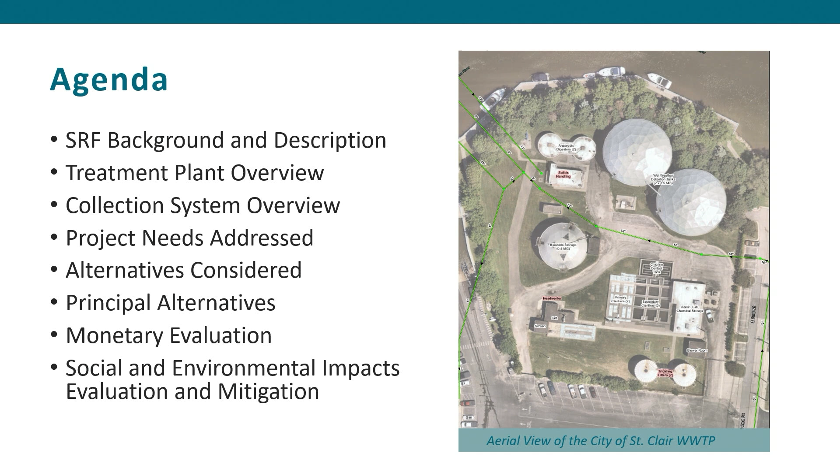Then go into a little more detail on what the SRF program terms the principal alternative, or the selected alternative, and talk about the monetary evaluation for that selected alternative.

And then go through those social and environmental impacts. So the SRF program, like I mentioned, was created in conjunction with the Clean Water Act, around 1987 when this program was developed. It's administered through EGLE — DEQ, DNR, whoever you want to call them, EGLE today. The program is intended to address water quality issues in the communities. It provides low interest funding and potentially some grant funding for studies and improvements to drinking water and wastewater systems.

So here's that graphic of the existing wastewater plant again. I'll go into a little technical detail here, but jump in with questions if they come up. The plant receives influent from the collection system, and that influent flow is either pumped directly into the treatment facility or into — I don't think you can see my cursor, but the two largest round tanks on the upper right side of the screen — those are the wet weather storage tanks.

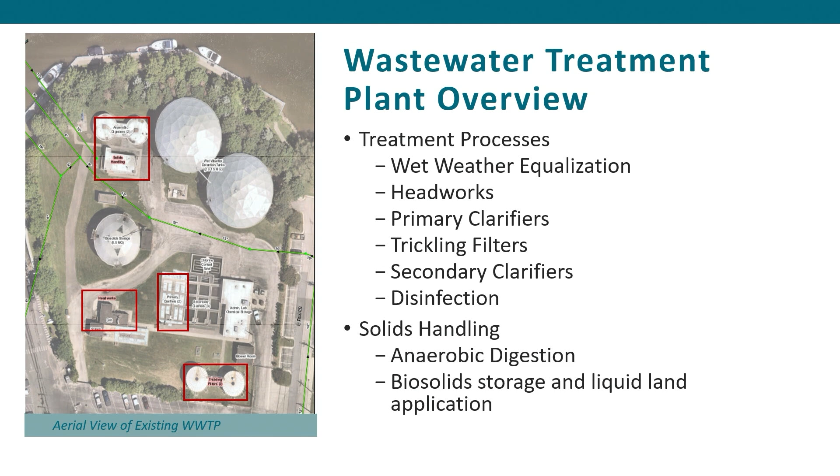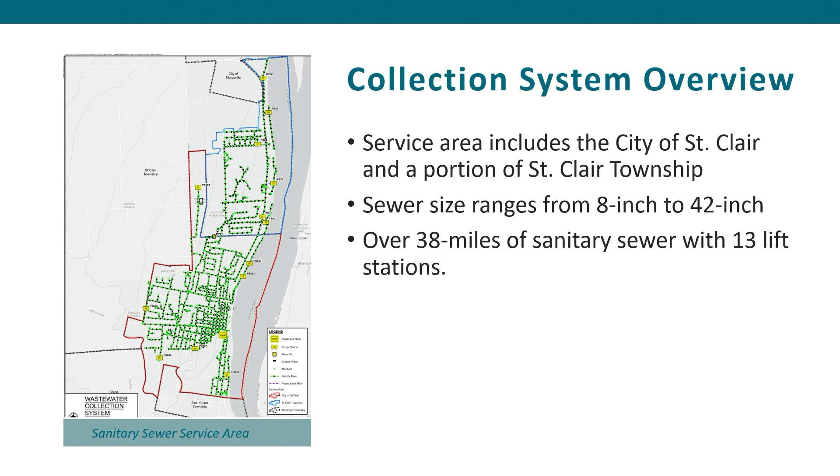Here's an overview of the collection system. The City of St. Clair, as well as a portion of St. Clair Township, are served by the collection system from the wastewater plant. Sewers range in size from 8-inch to 42-inch, and there's about 38 miles of sanitary sewer throughout the system.

To get into the need for the project, there have been a number of sanitary sewer overflows from the collection system. There are two wet weather storage tanks, but they sometimes have trouble utilizing those effectively, and as a result there's been some overflows. There are also safety and operational concerns throughout the plant.

A couple I'd like to highlight include some HVAC and electrical equipment in the headworks building that presents a safety concern. That environment can have an explosive atmosphere, and some of the equipment in those facilities isn't rated for that. And then also the trickling filters are a concern.

They have some rust through the existing tanks that present some safety concerns. The domes on those are in pretty poor condition at this point, through no fault of the city or the operators. They're just approaching the end of their useful life and are showing it.

We're looking to address those concerns. We'll get into the cost more, but since that's the number everybody cares about, we like to put it toward the front of the presentation. Our total estimated opinion of probable cost at this early stage is $5.72 million.

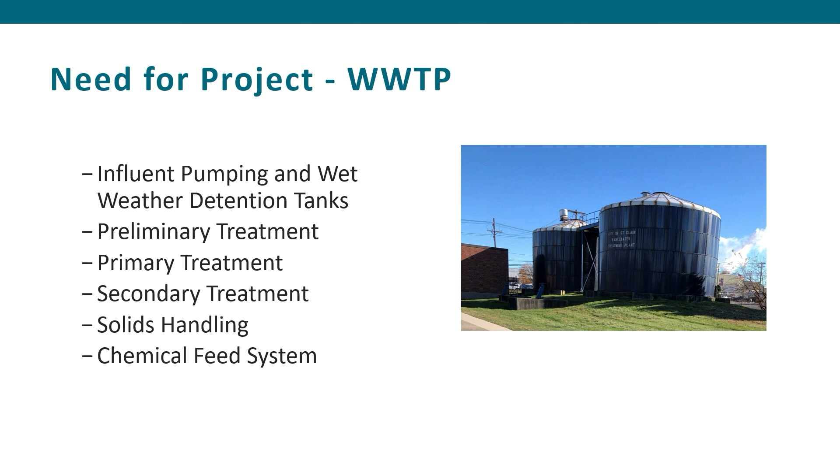In the collection system, the pump stations currently don't have backup power, so during wet weather events there are often power outages. Operators have to go around and try to deal with that the best they can, often through bypass pumping in certain instances. So we're looking to address that by providing backup power options, and also making improvements to the collection system.

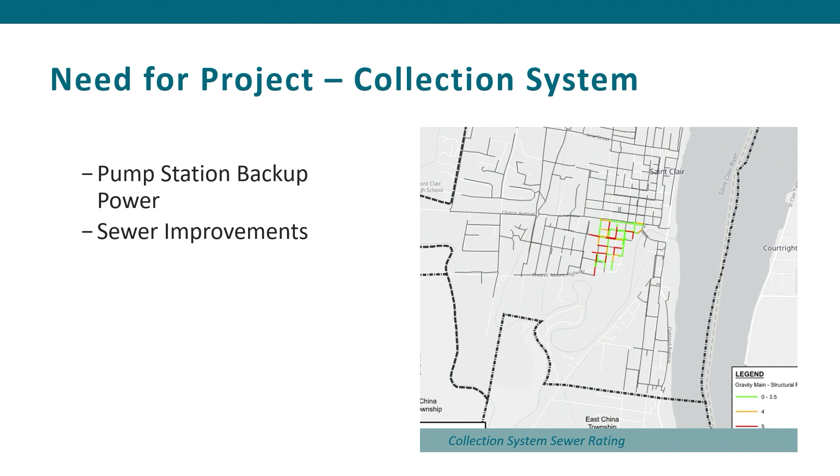For the pumping system, Dan's going to go through some of the details and alternatives we looked at in more detail here. But I'm going to step aside and let him take over. Thanks, Josh.

There's a somewhat prescriptive nature that the state requires for us to look at these alternatives. We look at 3 different alternatives for each recommendation: the first is a no-action alternative, the second is to optimize existing facilities through improvements and selective rehab, and the third is a construction alternative, which generally means completely replacing the item or process.

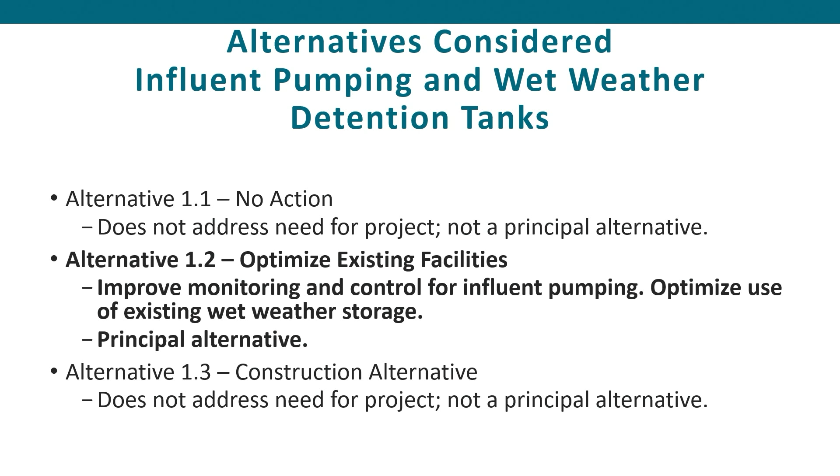For the influent pumping and wet weather detention tanks, the no-action alternative would not address our concerns about fully utilizing wet weather storage. Alternative 2, optimize, is what we're looking at to improve monitoring and control. The third option, replacing the wet weather storage, is overkill, not cost effective, and not the selected process. Most of these alternatives will end up being optimized; there's only one where we're doing a full construction alternative.

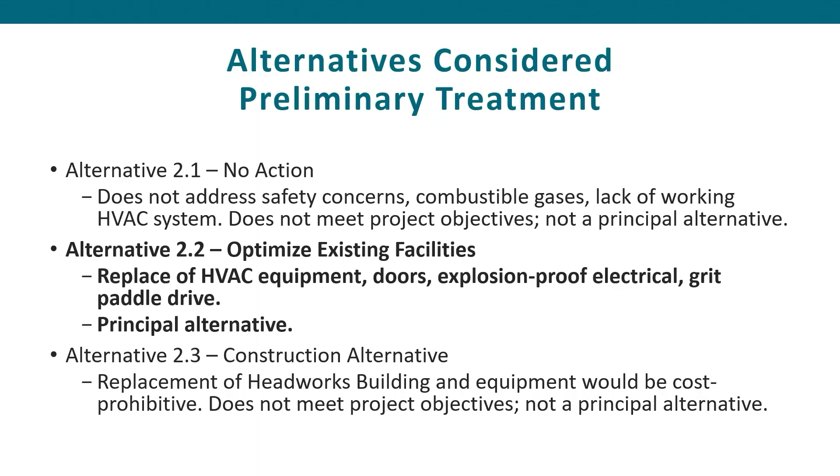For preliminary treatment, replacing the HVAC equipment, doors, and adding explosion-proof electrical, grit paddle drive is the optimize option. No action would not address those safety concerns, so that's not good for us, and construction of new headworks is not necessary and would be cost prohibitive.

For primary treatment, we're looking at repairing and replacing some existing chain and flight equipment and clarifier drives to maintain operation. We don't need to fully replace those tanks, so again that's the optimize existing facilities option. We feel the no-action alternative would not address the concerns we have at the primary clarifiers.

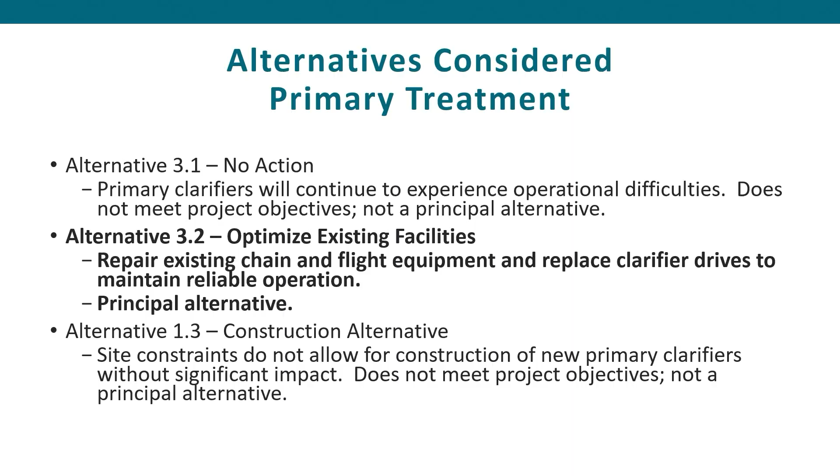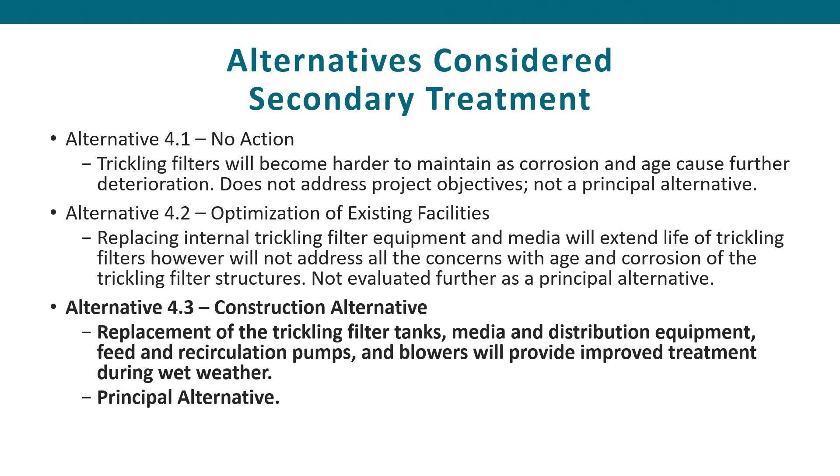This is the one area where we are recommending a full construction alternative: the trickling filters, those two tall towers, the bolted steel tanks you see at the wastewater plant. They've been harder to maintain due to corrosion and age. The no-action alternative is not effective, and while a rehab could extend the life, it doesn't address all the concerns. We feel the most effective way to deal with the trickling filters is to completely replace the tanks, media, and distribution equipment, pumps, and blowers, which would provide improved treatment and best extend the life of that secondary treatment.

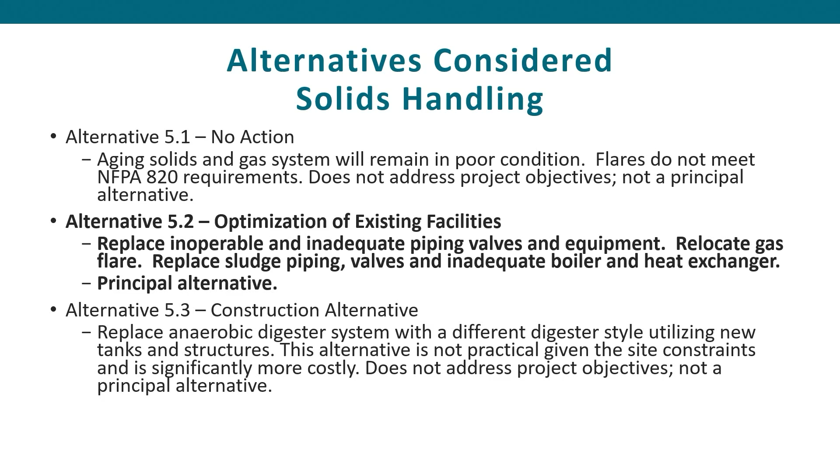For solids handling, we're looking at selected areas to be replaced: some piping and valves, the gas flare, some sludge piping valves, and the boiler and heat exchanger. There are systems that do need replacement, so no action isn't adequate, but the construction alternative is probably more excessive than needed at the plant at this time.

For the chemical feed system, the recommendations are not large and will be very effective in preventing overfilling. So again, that's optimizing the existing facilities to improve the ferric chloride feed system and provide level monitors.

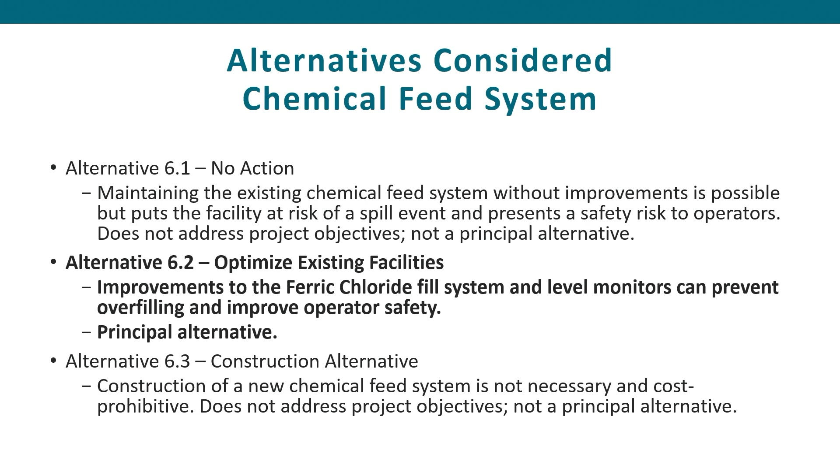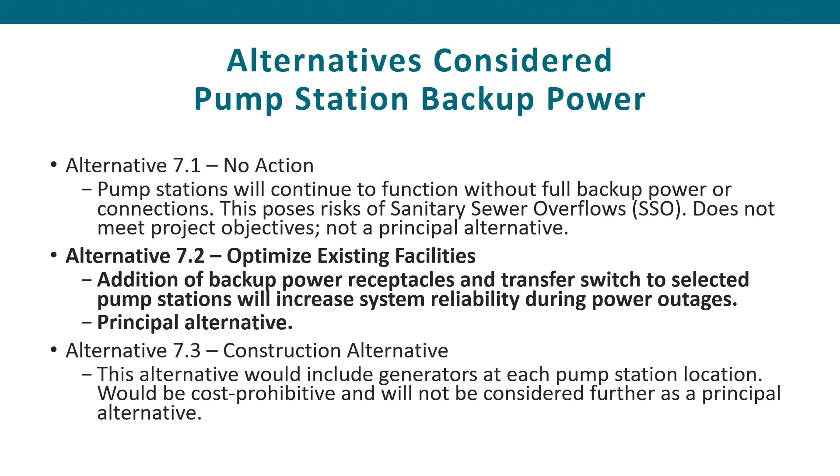For pump station backup power, there is a no-action alternative for some pump stations, and it's possible some may not need backup power if they're reliable. Others will need power receptacles and transfer switches, and what we're envisioning is probably a couple of portable generators that could move to pump stations as needed. The construction alternative of putting generators at every pump station is probably not necessary and would be cost prohibitive, so we're looking at a portable option with receptacles to rapidly provide backup power.

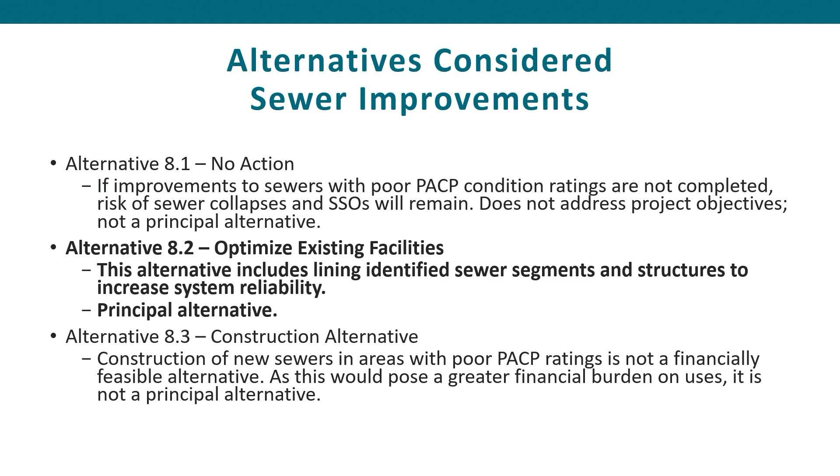For sewer improvements, we're looking at areas with poor PACP ratings and identifying selected sewer segments to line, including manholes and sewer segments. Construction of new sewers is not something we'd recommend at this time, but it's something that would be considered if you saw growth in an area or a need for additional capacity.

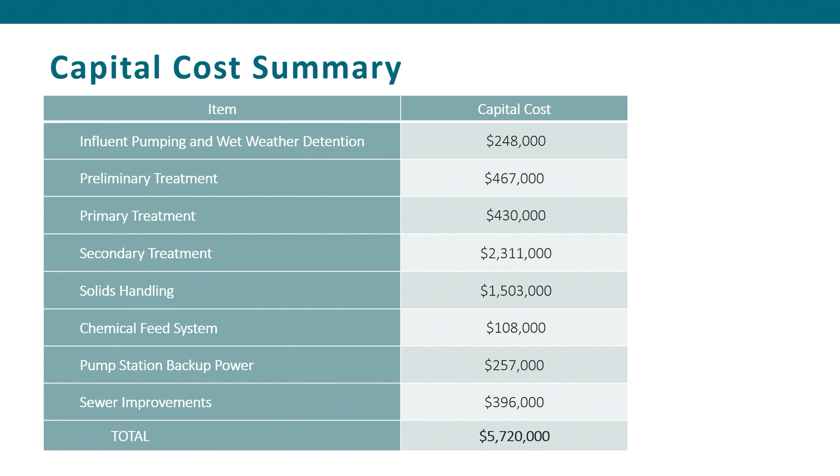Probably a more appropriate number for this body to look at is the capital cost summary, which is what it would cost for construction of each of these. We have an estimate for each of these options and a total, which is $5.72 million.

The most costly being the replacement of the trickling filters at $2.3 million. Daniel, are these just hard costs for construction? This has nothing to do with construction administration, inspection, or design and engineering, is that all cost built in per item? I believe these do include a construction admin number, I'd have to confirm that.

They do. Is it spread evenly, total amount of cost per item, 10%, 12%, 13%? Is it an even spread? It's an even spread, yes. So the state doesn't like to see contingency or engineering costs broken out. They want cost by line item included here, so we incorporate those contingency and design and construction engineering costs into each line item. Okay, thank you.

In terms of how this calculates out to an annual cost, the guidance right now through the state is to look at the SRF as a 3% low-interest loan on a 20-year basis. That means an annual debt payment of about $380,000 a year on a $5.72 million capital plan.

Looking at your flow numbers, residential use is estimated for 2025 at about 52% of the flow. So if we take that residential number and divide it by the number of active meters in the city, we come up with an anticipated user cost impact of about $17.30 per quarter, or about $69.17 per year.

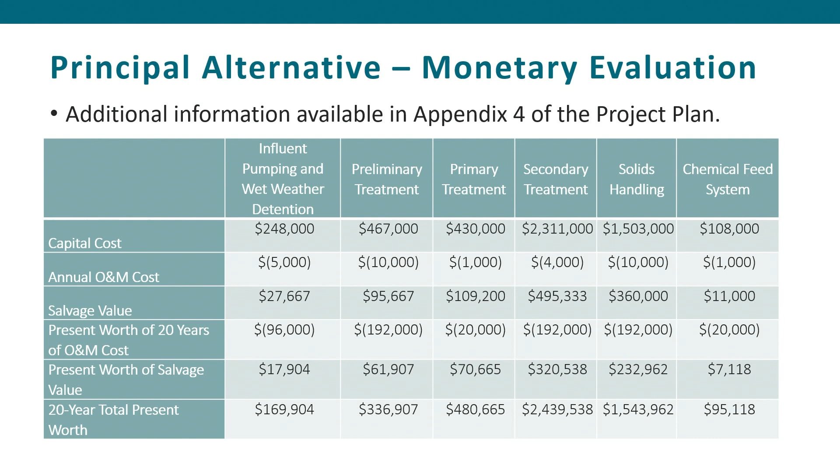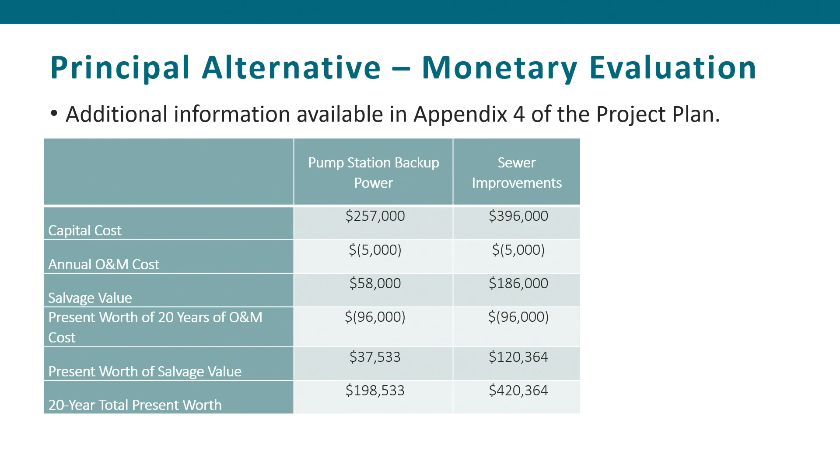Can you go over one more slide? Yeah. 96,000. We wouldn't anticipate major O&M savings associated with this. Largely, it's equipment replacement for failing things, so there are some emergency call-outs associated with that today. That's a rough number, but we have to do our best to estimate it. Thank you.

Josh, when we come up to the estimated construction costs and the various costs that add up to that slide right there, is there an index that's used to determine construction on those? Or is there a reference point—is it just previous projects and taking averages, or is there a national index based on influent pumping and preliminary treatment and things like that?

Yes to all of the questions. The way we go about cost estimating, we have a construction management group at Fishbeck. We work with them on some of our cost estimating. They understand current unit prices for things like excavation, sewer lining, concrete costs, things like that. During this stage, we often go out for equipment quotes. So for things like pumps or that grit paddle drive or specific pieces of equipment, we'll seek quotes for that early on.

And then we do use Engineering News Record, ENR, which has cost indices for construction costs. They're more backward looking than forward looking. I wish I had that crystal ball that tells us what's going to happen in the future, and we do include a fair amount of contingency in this to try and be conservative. Obviously, we don't know what's going to happen with steel prices or other commodity prices that could largely impact this, so we do our best to build in foreseeable costs as best we can.